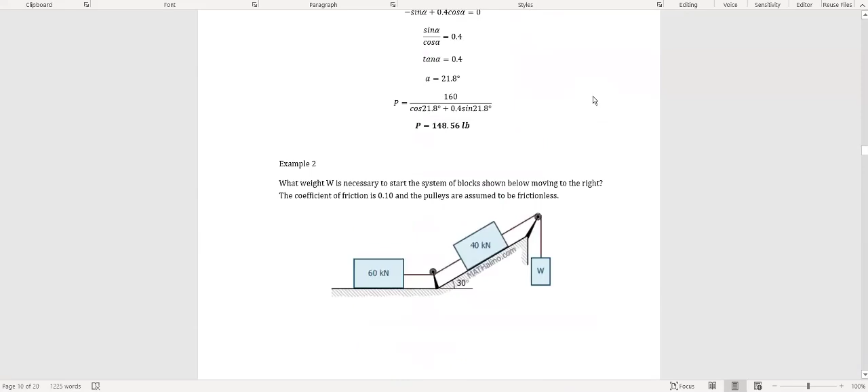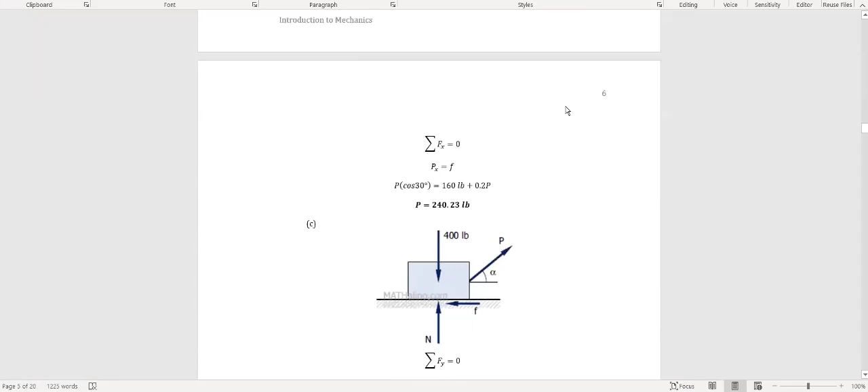Okay, so again by definition, balikan natin yung definition sa static friction dito. Kasi after ng static friction, we will discuss now yung kinetic friction. So static friction again, that is the force that resists the tendency of an object to move. Ibig sabihin, yung static friction yung nag-maintain ng object at rest, nire-resist niya gumalaw.

Ito namang kinetic friction, okay, yung malilito, this is the force that tends to resist the movement of an object. So yung static, pinipigilan yung paggalaw, and then ito namang kinetic friction, nire-resist niya or pinipigilan niya yung object habang gumagalaw. So yun lang yung pinagkaiba technically.

Kaya nga siya static friction kasi friction siya at rest. And then ito naman kinetic friction, obviously that is the friction while moving. So although gumagalaw na yung object, meron pa rin tayong friction na nai-a-apply dun sa object kahit na gumagalaw siya. Although siguro mas mababa, usually kasi mas mababa talaga yung kinetic friction kung iko-compare mo siya sa static friction.

Okay, so ganun pa rin, meron pa rin tayong tatlong scenario. If the applied force is less than the kinetic friction, obviously the object will eventually come to rest. Pag mas mababa yung applied force kaysa sa kinetic friction.

And then, if the applied force is equal to the kinetic friction, the object will have a constant velocity. Pagka nag-equal yung applied force mo at saka yung kinetic friction, so constant velocity lang, tuloy-tuloy lang yung object. And then, if the applied force is greater than the kinetic friction, then the object will be accelerating when moving across the other object.

Okay, so pag mas malaki naman yung applied force kaysa sa kinetic friction, so magkakaroon na ng acceleration, hindi na siya constant. Kasi na-overcome na nung applied force yung kinetic friction.

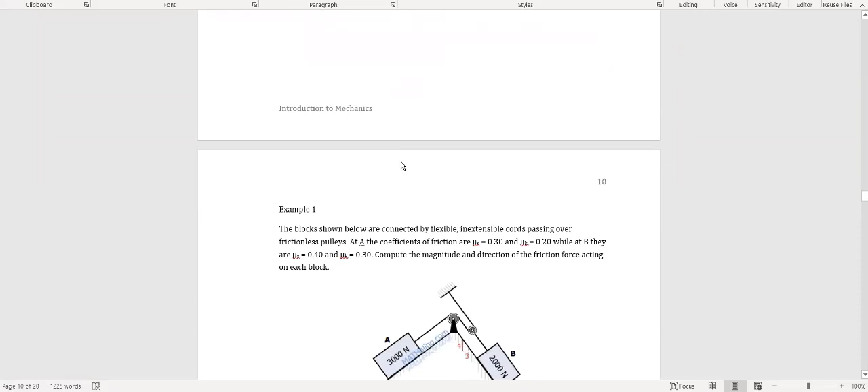Okay, so i-apply natin sa example yan. Isang application yan, class. Tulad nito sa example na to. The blocks shown below are connected by flexible. Flexible ibig sabihin nababali-bali. But inextensible ibig sabihin hindi nag-e-extend.

Meron kasi tayong mga materials na nag-e-extend. Passing over frictionless pulley, so meron tayong dalawang pulley diyan. So ito at block A, ito yung block A. So may dalawang klase ng friction.

We have the static, that is mu s, and then mu k yung coefficient of kinetic friction, that is 0.3 and 0.2 para dito sa block A. While dito sa block B, we have the coefficient of static friction 0.4 and then coefficient of kinetic friction, that is 0.3. So compute the magnitude and direction of the friction force acting on each block.

So simple lang ang hinahanap. Ano yung friction force sa A? Ano yung friction force sa B? And then saan papunta or ano yung direction niya.

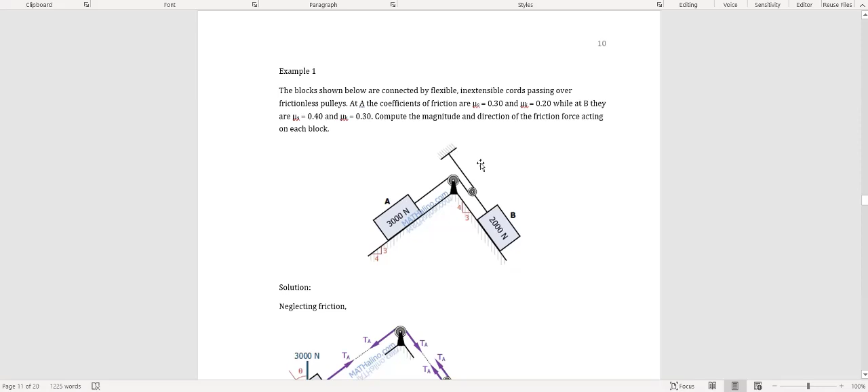Okay, the hard part in this certain problems, hindi siya tulad nung previous problem. Tingnan niyo to, ha. Ito kasi previous problem natin, madali niyong tawag dito, made-deduct na yung lahat ng block is obviously gusto natin lahat pumunta yung block doon, di ba? Lahat gusto natin going to the right kasi downward itong weight, eh. Kaya obviously ang agad natin diyan, yung lahat ng block na yun papunta sa kanan. So kung lahat ng block papunta sa kanan, obviously lahat ng friction force nandito papunta sa kaliwa. Madali natin ma-deduct yun. But what about this in this problem?

Mahirap i-deduct yun kasi tingnan niyo yung problem natin. Unang-una, hindi mo naman alam kung saan pupunta yung diyan. Sure ba kayo yung system is mahuhulog dito? Probably maniwala ka sa ito, hindi to at rest. Hindi to magbabalance itong system na to. Ngayon, ang tanong dyan, saan mapupunta yan?

Yan ba mapupunta ba yan dito going to the left? Or pwedeng dito siya mahulog sa right? Although mas mabigat yung block A, dahil 3,000 Newton. Yung block B is 2,000 Newton lang. But tingnan niyo, yung kinalalagyan ng block B mas steep.

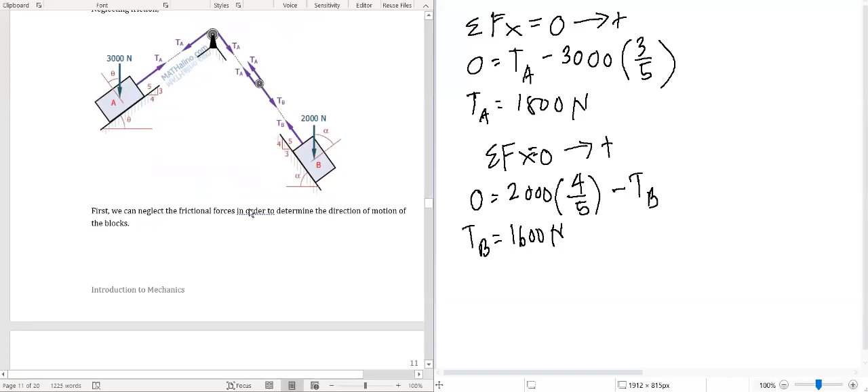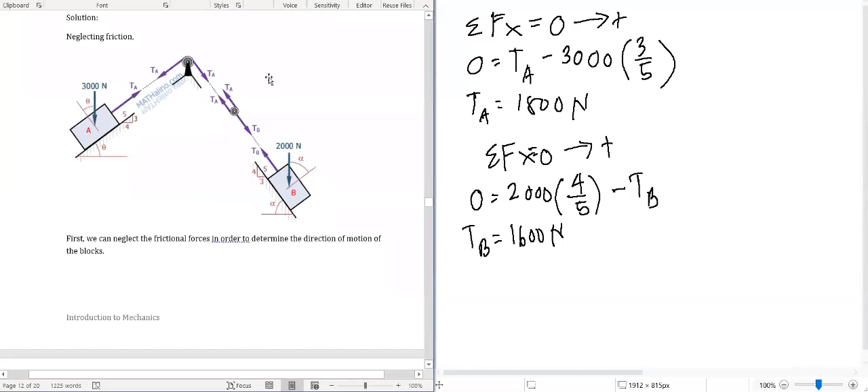Ayan, so ito yun. So by analyzing the pulley on the right, okay? So ito yung pulley na ito. Yung sinasabi niya, ito yun. Ayan, ito siya. So dito tayo magbabase kung pupunta ba sa kaliwa o pupunta ba sa kanan yung system.

So since 2TA, obviously mas mataas yung TA, lalo na kung i-times natin ng 2, magiging 3.6. Kasi pinag-aaral natin dito na yung tension force sa A is 1.8, dalawa pa yung humahatak na 1.8, ibig sabihin that is 3.6. Versus dun lang sa 1.6 ng TB, na yun lang hinahatak ng TB, 1.6 lang.

So we are assuming na yung object will be going to the left. Okay, yun yung maging assumption natin ngayon.

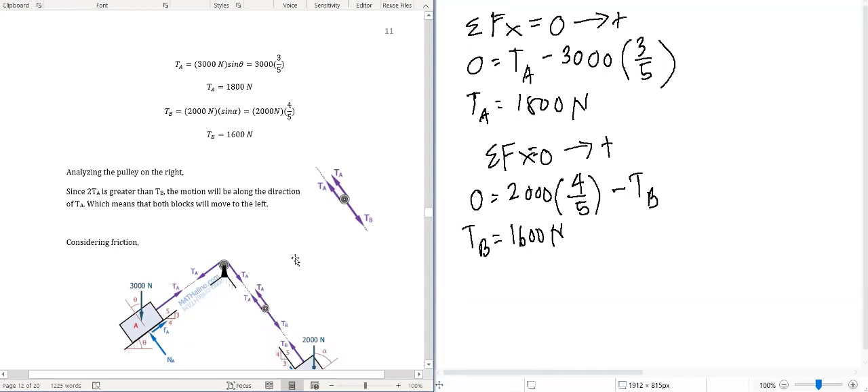Okay, kasi hindi pa natin talaga sure na kapag in-involve natin yung friction sa system, kung talagang pupunta siya sa kaliwa. Kasi obviously dito kaya natin na i-deduct na yung system ay pupunta sa kaliwa dahil mas mabigat yung block A. At another thing is tineglect natin yung friction, which is a very big factor. Kaya lamang na lamang talaga yung block A pagdating dun sa hatakan.

Okay, so ngayon tingnan natin, pag isinama natin yung friction, tingnan natin kung talagang pupunta pa siya sa kaliwa or lalamang na yung block B, dahil mas steep yung surface ng block B. So since 2TA is greater than TB, the motion will be along the direction of TA, which means both blocks will be moved to the left.

Okay, so we're assuming na mahahatak pa itong block B papunta sa left. Ngayon, since papunta tayo sa left, magkakaroon na tayo ng assumption direction para sa friction. Kung papunta sa left lahat ng system, kung papunta sa left to, obviously yung friction dito is papunta sa kanan.

Okay, nakita nyo ba? Ito yung friction. Kasi we are assuming we're going to the left, so mag-oppose yung friction.

So we're considering the normal force then. The same thing sa block B, we're considering this also as papunta sa left kasi mahahatak siya ng block A. So yung friction at B will be considering going to the right. Okay, then we are also given the normal force at block B.

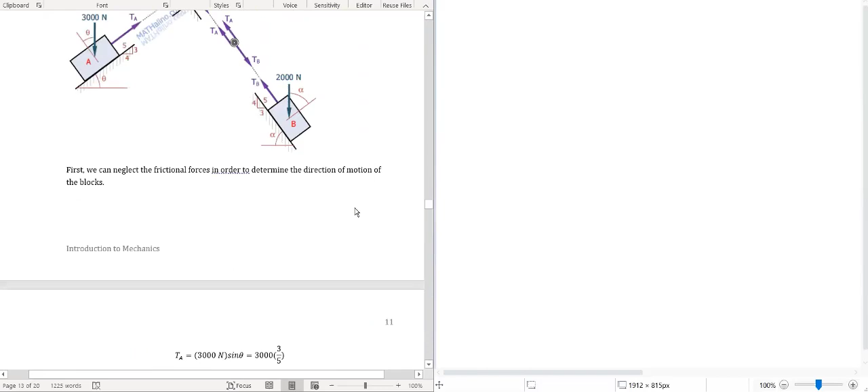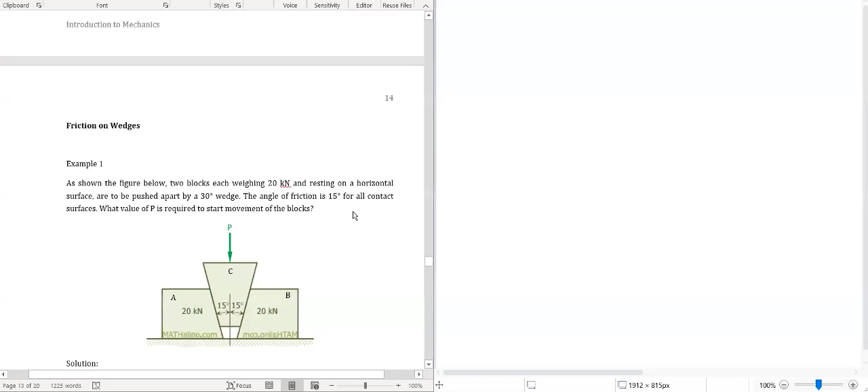Okay, so now we're going to talk about the friction on the wedges, yung mga brake parts. Dalhin natin siya sa example para mas ma-gets niyo yung principle niya. Iba-ibang klaseng ano 'to, I hope yung mga knowledge na dini-discuss natin dito sa Zoom tsaka yung recording, obviously hindi yun sapat lagi, kaya nga tayo may ginagawang problem set para i-expand yung knowledge niyo regarding the lesson. Ang kaya ko lang talaga ituro sa inyo is yung basic kasi napakaraming senaryong puwedeng mangyari, pero ang sinasabi ko lang lagi sa inyo yung basic, eto lang yan, eto lang yan. Ngayon, yung basic na tinuturo ko mai-a-apply niyo yun sa iba't ibang klaseng senaryo na kailangan niyong diskartehan. Kaya hindi niyo 'to madadali ng paisa-isang example lang sa dini-discuss ko, okey?

So meron tayong figure dito, as shown the figure below. Meron tayong dalawang block, block A and block B, both are weighing 20 kilonewton, at rest on a horizontal surface. This is a fixed surface, that is to be pushed by a 30 degree wedge. Ito yung wedge na tinatawag, block C, 30 degrees, yung angle ng wedge combined. The angle of friction is 15 degrees for all contact. So what force P is required to start the movement of the block?

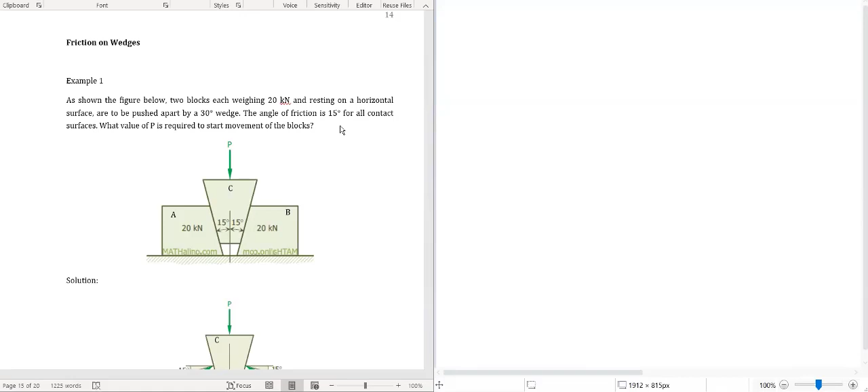So ang friction diyan is nandito sa surface na 'to at saka sa surface na 'to. Kaya lang kung napansin niyo wala namang given na coefficient of static friction, wala rin namang given na coefficient of kinetic friction. Pero given yung angle of friction, which is yun yung gagamitin natin, that is the ratio of the friction force and the normal force.

Okay, so eto ngayon yung magiging ano sa kanya. Tingnan niyo, nage-gets niyo ba 'to kung paano nangyari 'to? Okay, so eto yung free body diagram niya. So both A and B, both are 20 kilonewton. Ibig sabihin kahit saan kayo mag-solve yan, okey lang. Puwede kayong mag-solve dito sa A or dito sa B, parehas lang naman yan, eh. Okay? So tingnan niyo itong angle.

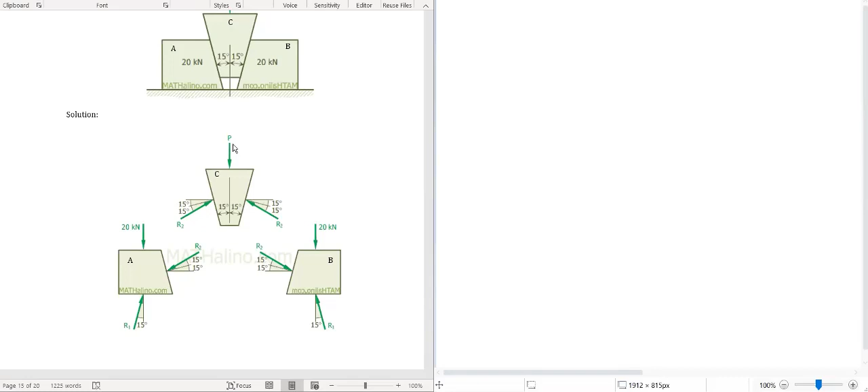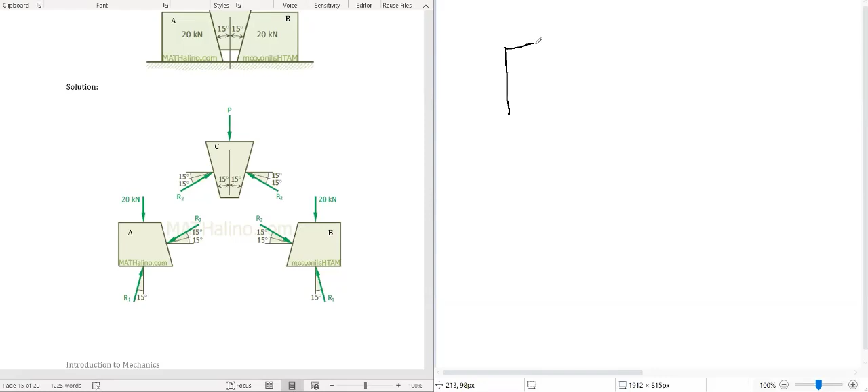Since ang sabi dito, yung angle of friction is 15 degrees in all contact, tingnan niyo 'to, yung reaction sa surface, ibig sabihin ang friction diyan, drawing nga rin ako. Ito kasi siya, eh, ayan. Usually class, 'di ba ang normal force natin or ang reaction ng surface usually perpendicular yan sa surface. Kung normal force yan, okey?

Kaya lang 'di ba ang sabi dito, nagbigay ng angle of friction, 'di ba yung angle of friction nakabase yun sa friction force at saka sa normal force, ibig sabihin yun na yung summation, okey, nung normal force at saka nung friction, which is eto na yun, which is yan na yung total resultant ng reaction, okey, ayan.

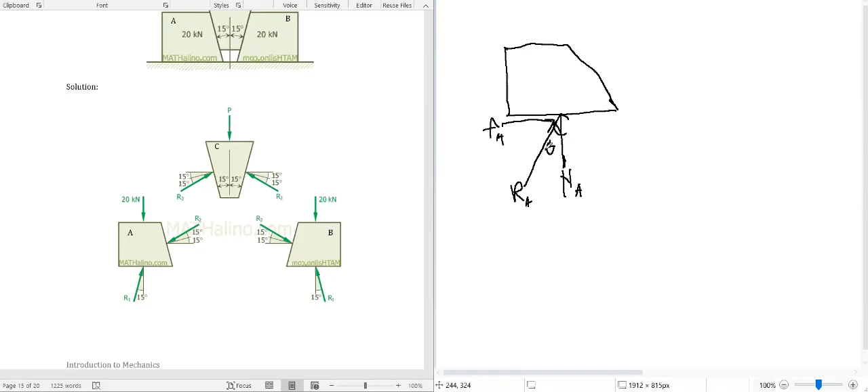So kaya given yung angle of friction, I think that is angle phi, okey, ayan. So dun nakuha yan, kaya 'Sir bakit yung normal force hindi perpendicular?' Kasi nga hindi naman 'to basta normal force lang, that is the reaction of both the normal force and the friction force. Tas yung angle na given na yan, that is the angle of friction, yung pinakaunang-unang topic natin. Okay, yung angle of friction, diyan yun. Kaya hindi perpendicular yung reaction.

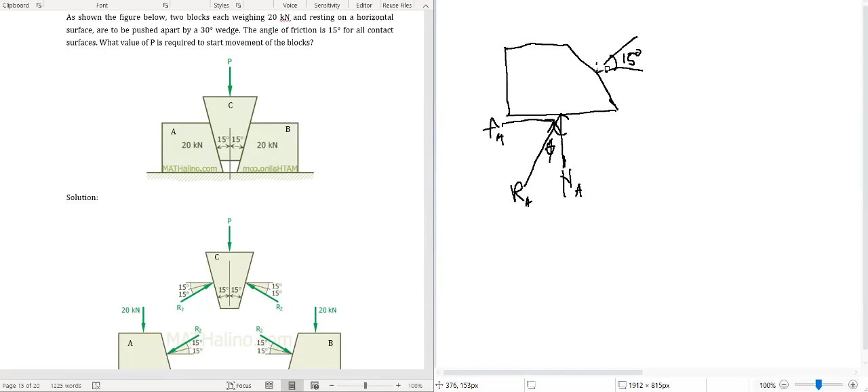At the same time, usually class, 'di ba ang pagka ganyang magdidikit yung object, dapat ang reaction force diyan ganyan. Ngayon yung angle na 'to, dapat eto yung angle ng alin, obviously dapat eto yung angle na 'to, that is 15 degrees din dapat yan. Kaya nga lang, dahil lahat nga ng angle of friction is 15 degrees, so magkakaroon na naman tayo ng adjustment diyan na 15 degrees. Kaya aangat ulit siya ng panibagong 15 degrees, ayan. So eto na ngayon yung magiging reaction sa 2, another 15 degrees. Okay, so lagi lang gano'n, lagi niyong i-a-add yung angle nung kinokontakan and then yung angle of friction para din dito sa reaction ng block.

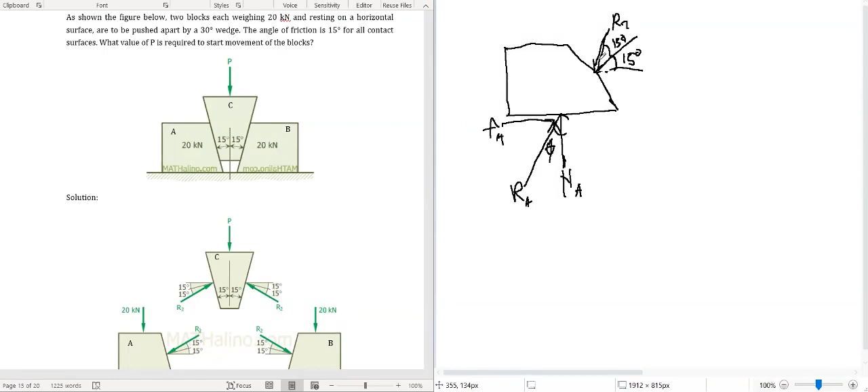Okay, nagets niyo ba? Pag nagawa niyo 'yan, makakapag-solve na kayo. Basta wala namang mahirap sa mga formula, ang mahirap lang talaga dito mag-analyze.

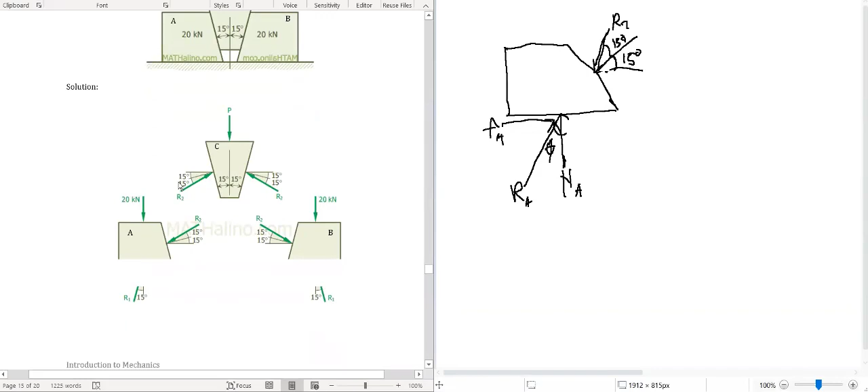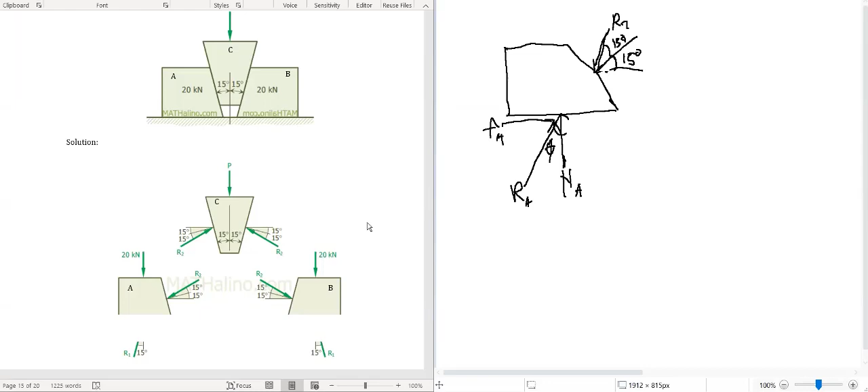Na-imagine niyo ba kung bakit naging 15 plus 15? Kasi yung 15 na isa, dito nanggaling dahil 15 degrees yung pagkaka-slant niya, at yung isang 15 degrees, yun naman yung angle of friction kasi yung magiging reaction ng friction will be 15 degrees. Kung na-deduct natin yan, ayan, maso-solve na, ganon lang kadali.

Di ko nasusulat siguro 'to. Summation of forces along x must be equal to 0. So lahat ng x component, ano yung mga x component sa R1? That is R1, so x component, ano, dapat dito cosine 75.

Kaya lang ginamit niya is sin 15 na lang, so pwede rin naman yun. Kasi naka-base sa y-axis yung angle, eh. Pwedeng cosine 75, pwedeng sin 15. I hope master niyo na yung mga ganon sa trigonometry.

The same, so dito naman sa R2, based on the x-axis, that would be R2 multiplied by cosine 30. So two unknowns, one equation, wala tayong makukuha diyan pero pwede natin kunin yung relation. That is R1 is equal to 3.3462, that is ano lang naman, cosine 30 over sin 15, that is 3.3462.

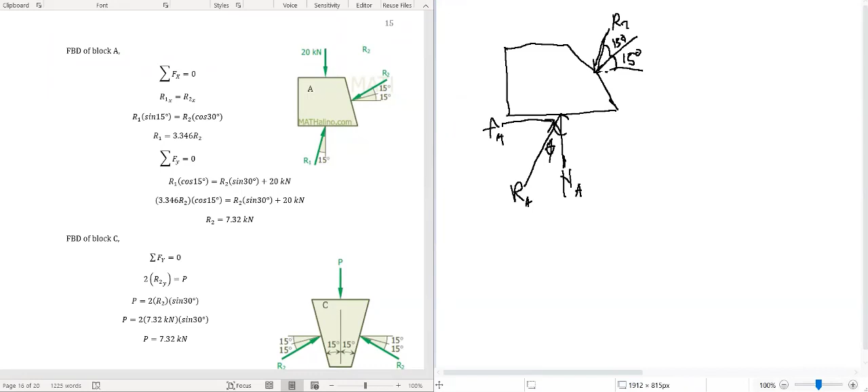And then summation of forces along y, okay, that is equal to 0. Okay, so lahat ng isulat ko na nga, ano ako, eh. Summation of forces along y is equal to 0, lahat ng pataas positive.

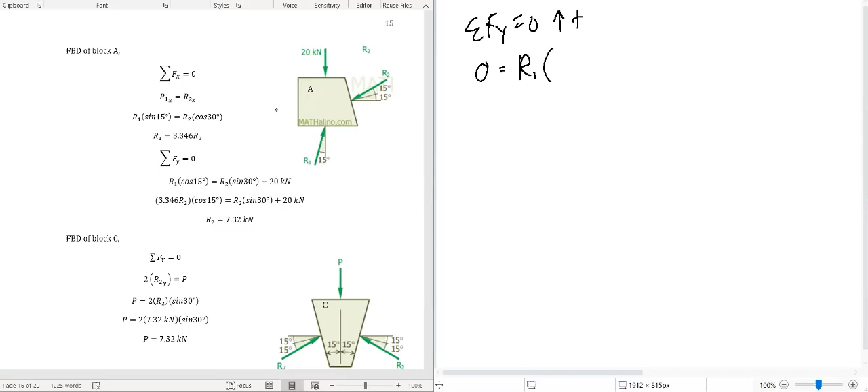So anong mga pataas? Pataas yung R1, okay? Ang kailangan ko lang sa R1 is yung y component, since based sa y-axis, gawin ko siyang 75 yung gagamitin ko. Ito 75 kasi ito, di ba? Ayan, so since y gagamitin ko yung sin 75, okay? Pwedeng sin 75, kayo talaga bahala sa preference niyo, pwedeng sin 75, pwedeng cosine 15, ayun.

Equals, or ano ba, minus sa lahat ng pababa. Ang pababa yung 20 kilonewton, pababa ito, pababa rin yung R2. So minus R2 multiply by, kailangan ko yung y component ng R2, that is sin 30.

Okay, since R1 nga is equal to yung relation natin kanina, that is 3.3462... 3.346 lang pala. So R2 sin 75 minus 20 minus R2 sin 30. So maso-solve natin yung R2 diyan. So R2 is equal to what? So 0 equals 3.346, R2 sin 75 minus 20 minus R2 sin 30.

Check natin kung tama yung sagot dito, 7.32, ayan, tama lang. 7.32 kilonewton. Ibig sabihin, yun yung naa-apply na force nung wedge na isisingit nyo, 7.32 kilonewton. Okay, so pag nag-free body diagram tayo dun sa may mismong wedge na isisingit nyo, diyan makukuha natin yung force P na kailangan nyong i-apply.

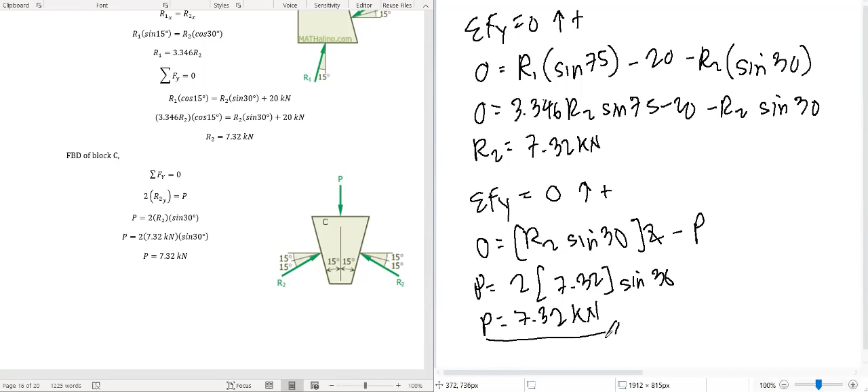Basta nakagawa lang kayo ng free body. Marami pang example na to sa MATHalino, pwede nyo pang i-expand yung knowledge nyo regarding this. Pero yun na yung pinaka-basic dito, class.

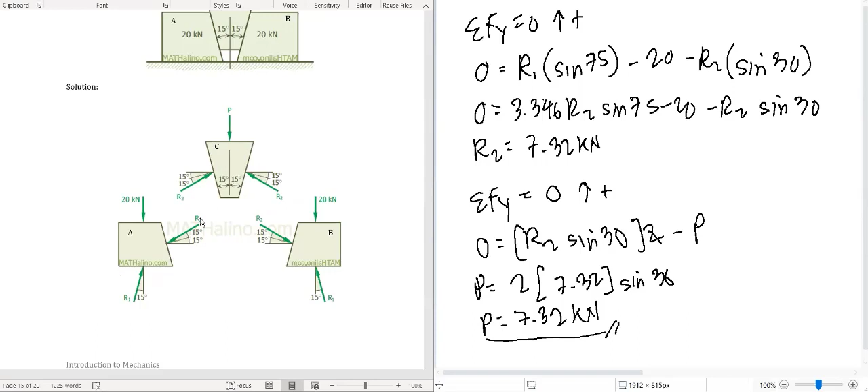Yung paggawa ng free body diagram, again, napaka-importante na naiintindihan nyo yung angle of friction. Okay, dito sa surface, that is based on the y component. And then dito naman, yung sa contact ng dalawang block, okay, pag-a-addin nyo yung angle of friction at saka yung angle ng inclination ng block.

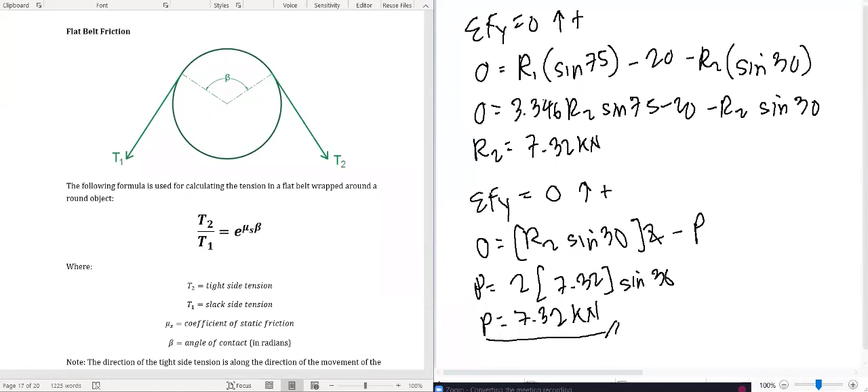Okay, so for the last topics of friction, we have flat belt friction or friction at pulleys. Actually, it's not just pulleys but anything that uses a cord wrapped around a round object.

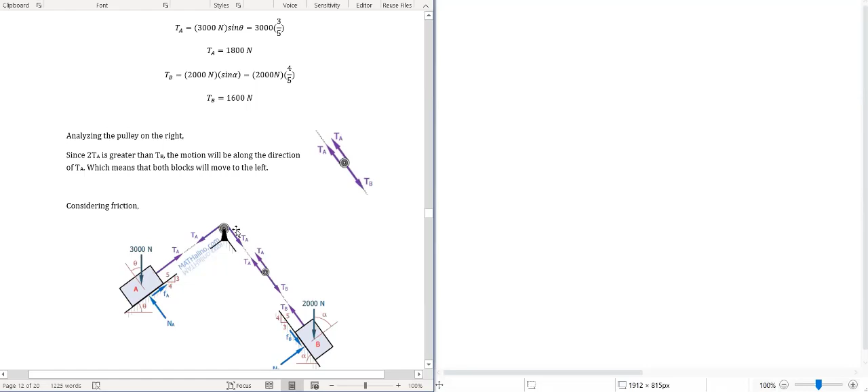The same thing happens with the small pulley. The tension on this part becomes equal to the tension on the opposite side, which in reality is not actually equal because we have losses due to friction at the pulley.

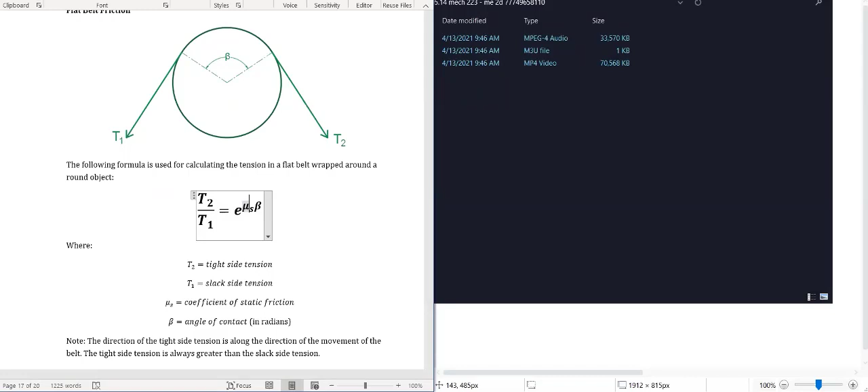Then the coefficient of static friction — that still depends on the material. So that's the coefficient of static friction. And then the angle of contact — that's the angle of contact between the pulley and the belt.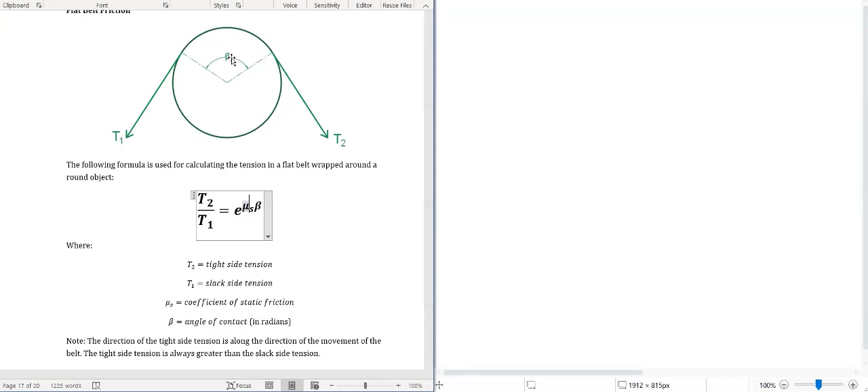That's the only formula, nothing special about it. Note the direction of the tight side tension is along the direction of movement of the belt. So let's give an example.

This example isn't actually about a belt. We have a weight below that is held up by a force, with a rope wrapped 1.5 turns around a horizontal pole. This is the horizontal pole, and we have a weight of 20 kg here.

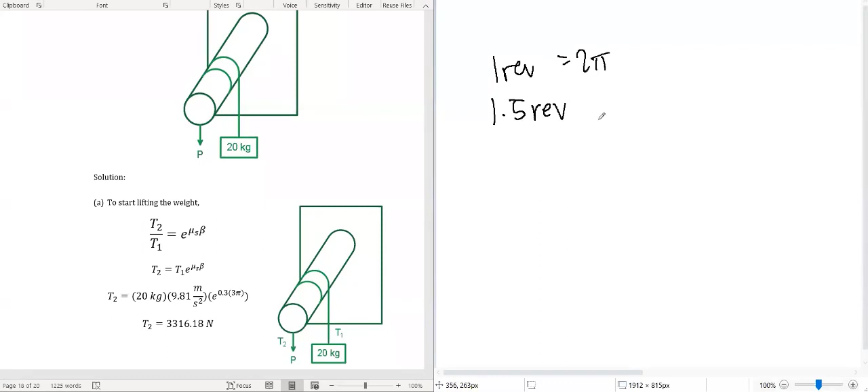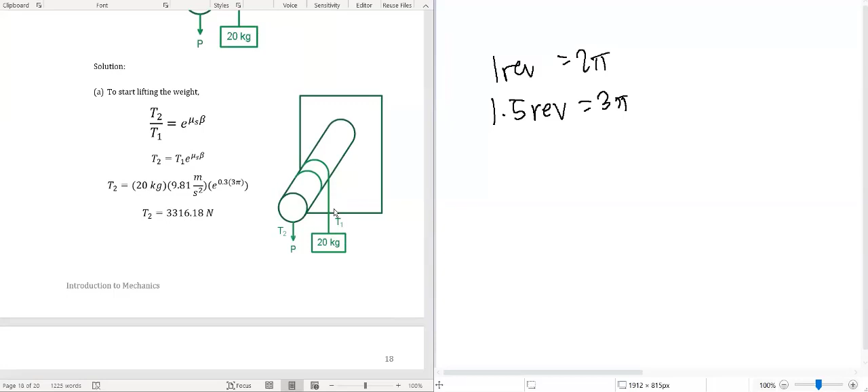Like that. So let's check it in the calculator, in case that's wrong. 20 times 9.81 times E raised to 0.3 times 3 pi. That equals 3316.18 Newton. So that's the force you need to sustain the 20 kg weight. That's pretty heavy.

Okay, next is the tension needed to lift the object. This time the object needs to be moving, so we don't use the coefficient of static friction anymore, we use the coefficient of kinetic friction since the object is moving. Same formula though - T2 is what we're looking for, on the tight side. That equals T1, which is 20 times 9.81, raised to... we just changed static friction to kinetic friction, so our given becomes 0.25.

So again that's 1.5 revolutions which is equivalent to 3 pi. Let's check if the answer is right. That's 20 times 9.81 times e raised to 0.25 times 3 pi. That equals 2070.05. The question there, class, someone already answered this.